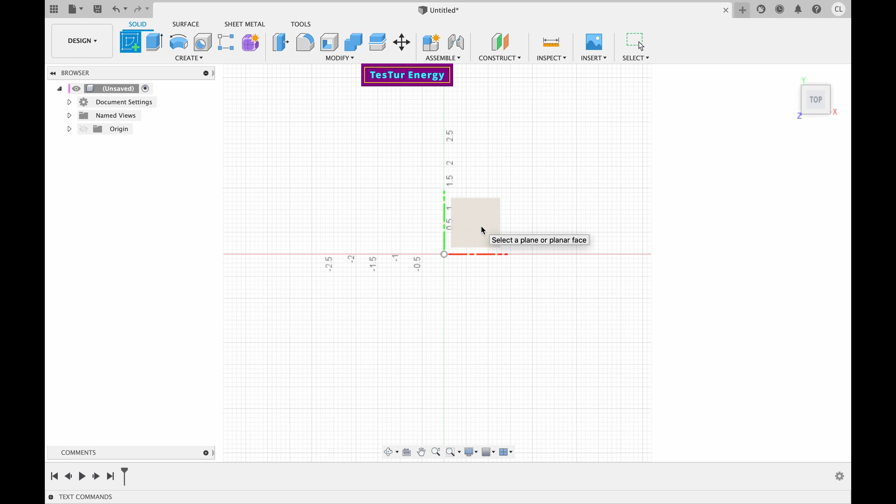So let's just get started right off the bat here. You can see that we're in a blank screen on Fusion 360 and it's untitled, and I'm just going to go ahead and start. What you're going to want to do is create a sketch and set the dimension, or set the angle that, which dimension it'll be operating from.

And what I always like to do is just start by making your first size of the disc. Let's go 5 inches. I really do not like seeing the dimensions on the screen when I'm building. I know what it is when I'm building it. I hate it later though because I never know what it is.

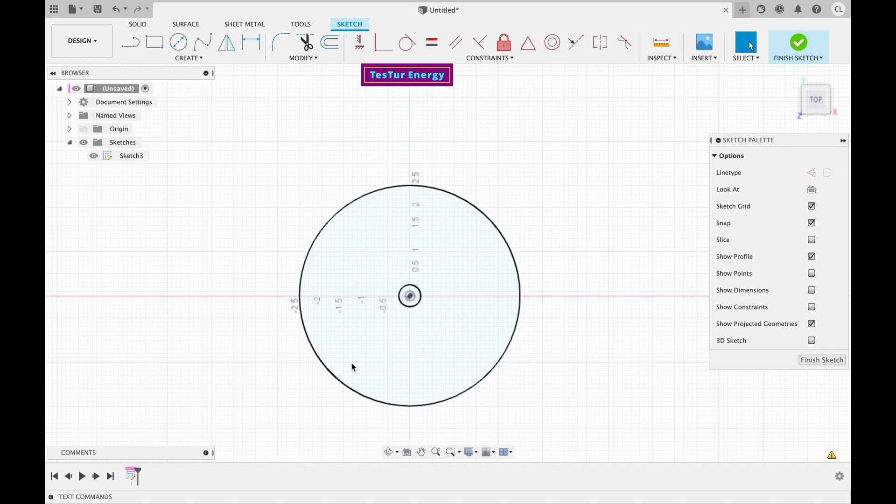But yeah, so I would just go with a 1/2 inch drive shaft in the center. Now, depending on if you want to do the old version or the new one, where you do a hub and then the hub of discs go on another shaft, or just everything goes on a shaft and you don't have the hub system, we'll just do the quick straight from the drive shaft.

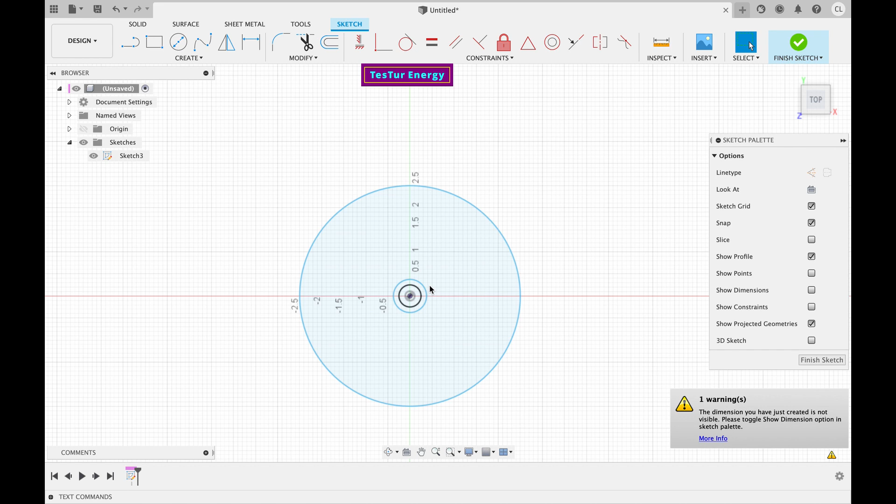So still you need an inner portion of the discs that are connected together where the spokes meet. So I'm just going to go with a 0.75, nope, not 75, 0.75. So we got about, I think it's 1/8 inch or 1/4 inch thick here. Let's see what that says. Yeah, it's 1/8 inch between. Let's go with a full, let's just do 1 inch, a full 1/4 inch in there.

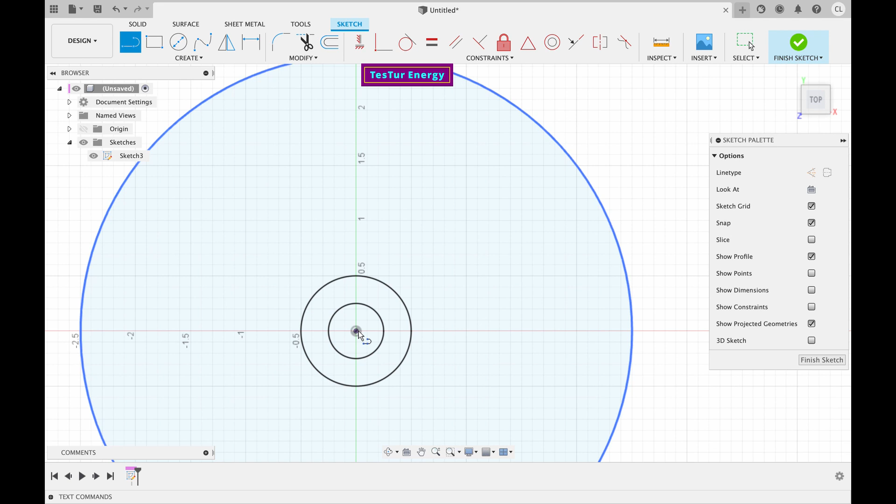So then I usually start with making the first spoke, and we know we're going to go up. You could go left and build them that way, either way works. And it's just, say we know we want all of the spokes within 1/2 the diameter of the actual disc.

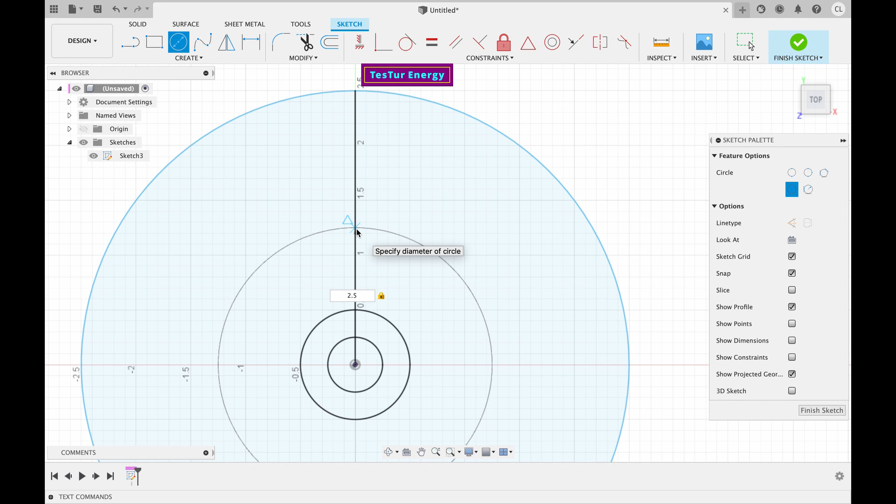So when we do all of the exhaust within 1/2 the diameter, that leaves 75% of the total disc area to still be usable for adhesive drag, for torque or for pumping.

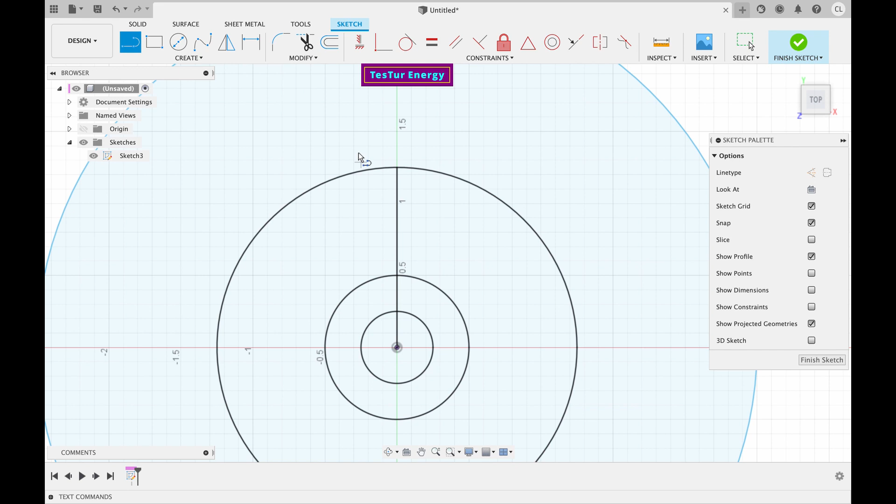But so we've got the inside here. Go to the offset. Make the first offset. Let's just say this are. We'll go with 1/8 inch thick. So 1/16 to this to the right, and then 1/16 to the left.

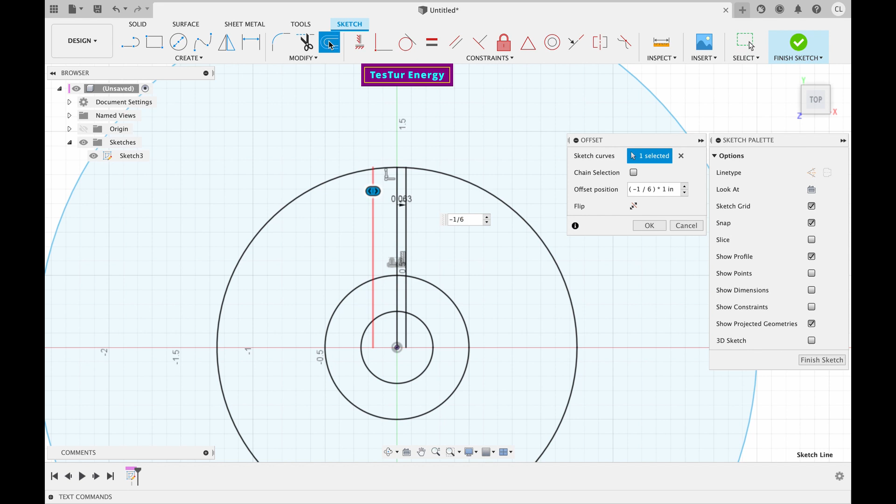Get rid of the center and trim off these lines. So we've got the majority of what's going on here. Then we're going to remove that so we can do our fillet. We're going to do that. Click the line. Let's just set it to 0.15. Do the same to the other side here.

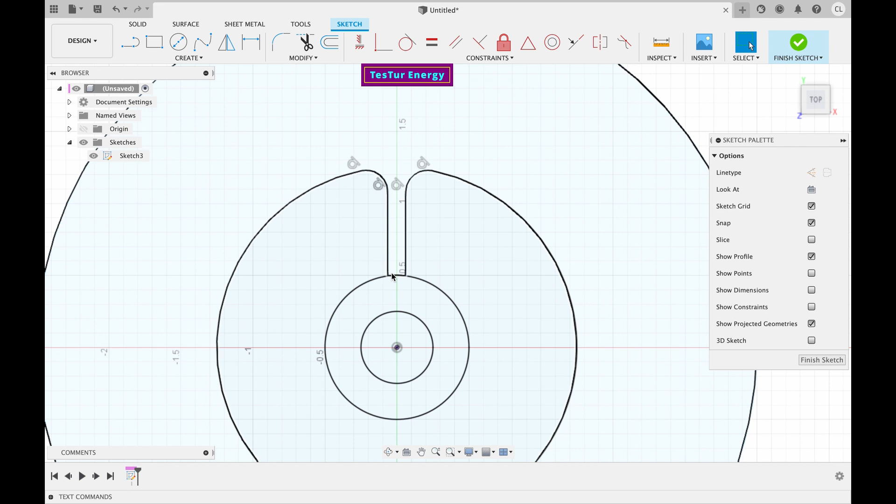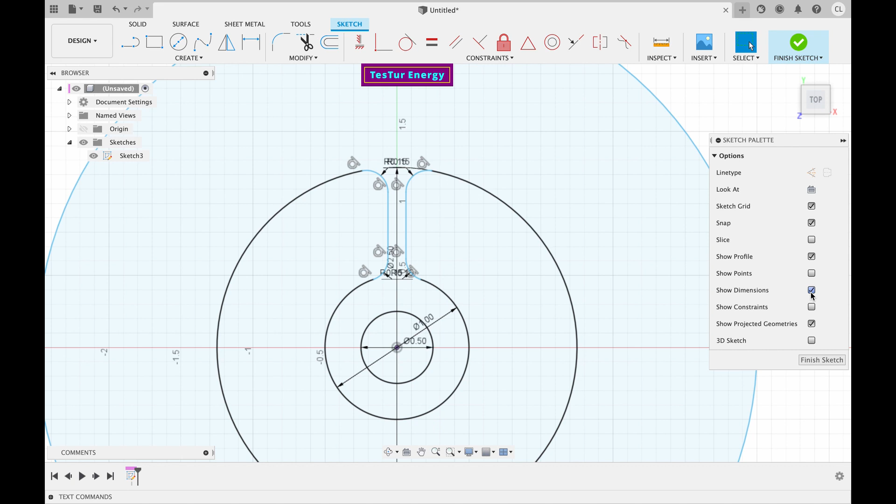Now we're going to do on the inside here. Just do the same geometry. These might come out a little skinny. I'm not saying you should do it exactly to this size. I'm just, oh shoot, what did I do to the other side? So I do 0.15. Yeah, there we go. If the dimensions keep showing up even though you've clicked on the thing on the side, and if you click it again, it'll go away. There we go.

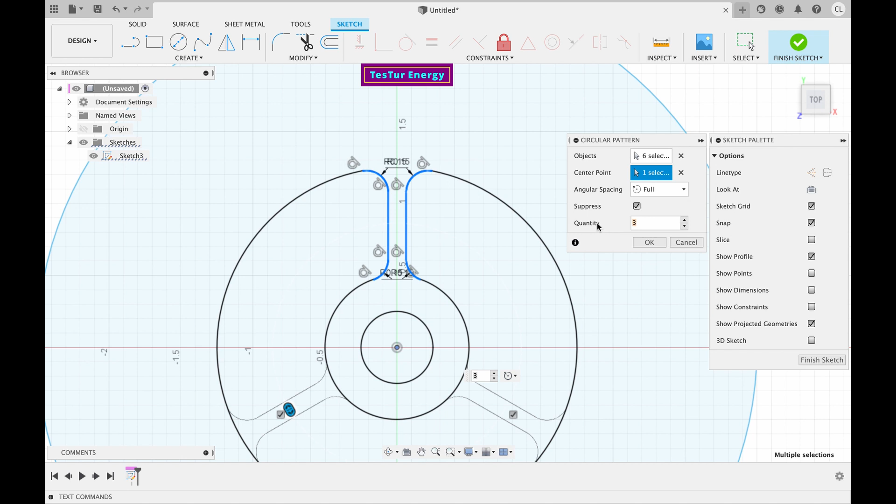So now we've got this basic geometry of the first spoke. I'm going to grab each one of these—I say grab, it just means select each one. And you're going to come up to create and do circular pattern. And click your center point, select the center point, and then you're going to choose how many spokes you would like.

If you want to do 3, you can do 3. If you want to do 4, if you want to do 5, 6, 7, you can do as many as you want. I usually just go with 6 because I like honeycomb, and it's usually honeycomb finds to be really, really strong in most applications. Not always, but generally you want eventually to pick what will not...

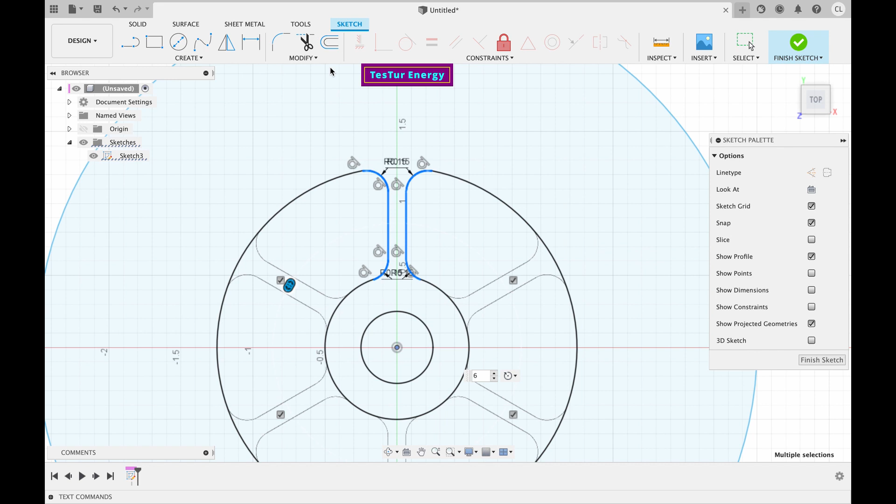combine with the resonances of your disc when they rotate, because at high RPMs they take cymatic vibrational modes, and you can kind of tweak your spoke numbers so that those vibrational nodes are dissonant with the number of spokes, so that it doesn't add to building up where the spokes are or aren't, and you get catastrophic effects. It's not a solution for everything, but it's something, if you really want to go down that rabbit hole, you can probably play with.

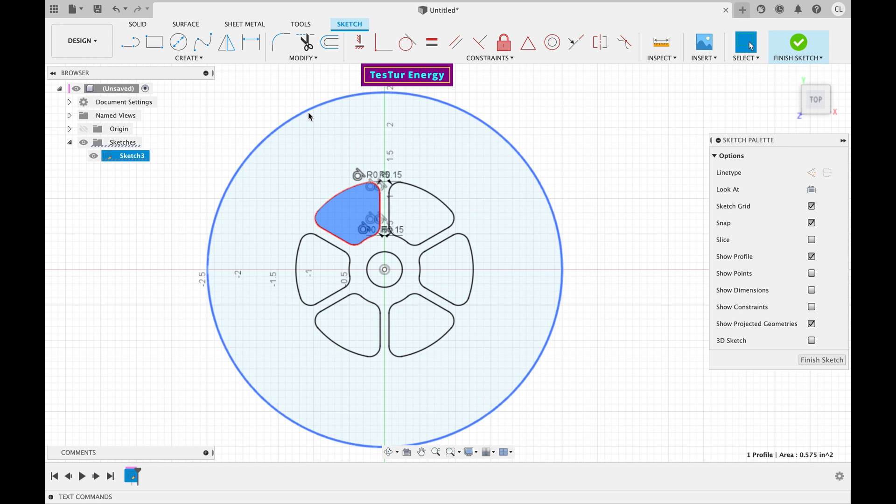And there we are. We've got a decent disc, we got spokes, we got the pretty large open area from a 5-inch disc. That's 0.575 squared inches per hole. There's 6 of them, so about a little over 3 squared inches. Pretty good size for an exhaust of a 5-inch disc, and you still have 75% of the open surface area here to be used for torque.

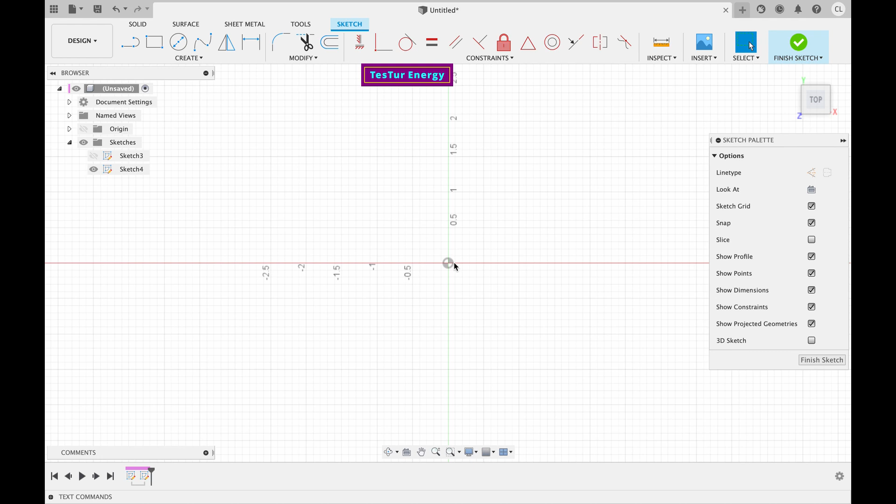Okay, so now we've got our disc. Now we're going to need a set of star washers. So we're going to copy all of these, finish the sketch, start a new one and paste them here. Alright, so I'm going to hide these dimensions and constraints.

Now, depending on what you want, how long you want your star washers, Tesla says to go really far past the holes. You can go really, really far, or short, depending on how big they are too. He says specifically in the patents that the star washers are only for creating the spacing in the center. So if you're doing thin sheet metal like I do, you can press the dimples in the periphery here for making the spacing, and continue pressing them in the center. And he says specifically that the star washers are preferable, not indispensable, and you can use just a center hub or a center circle that goes just about the length of the inner hub of the discs.

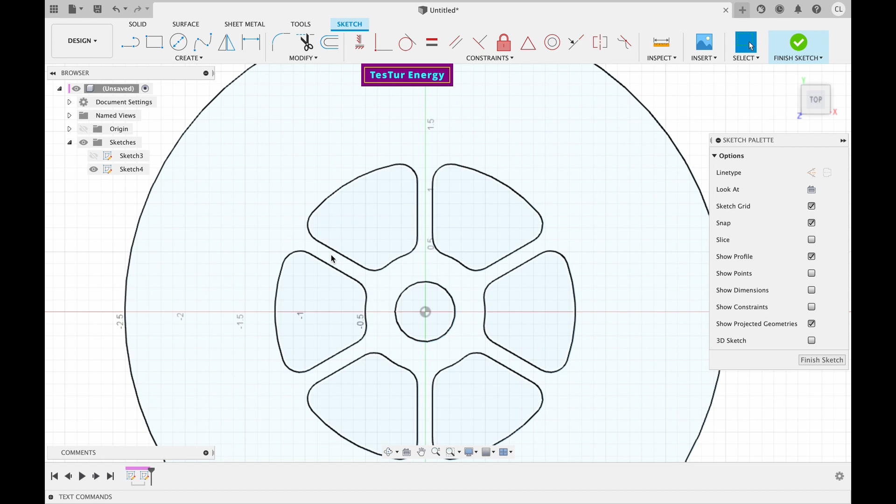I believe he says it's preferable to do the star washers, because if you have the space from the hub and then you also have spacers out past the exhaust holes, the spokes with a lot of air going in them can probably vibrate. If you have really thin ones like mine, they probably act like a harmonica where they'd get high tension vibration as the fluid's going past them fast.

But okay, we'll go to a line, do a line up this way to about 1.5 inches for this 5-inch disc. Do a 1/8 thickness here. This is if you want to just do star washers that are little straight spokes. And again, by no means is this the proper dimensions you should be doing with yours. I'm just doing a random layout of how to put this specific geometry together.

You can change if you want to increase this. You want to increase the diameter of the inner spokes, or bring this down, or widen your spokes - have at it. This is just to show you what to do to get these basic patterns on the page and work from there.

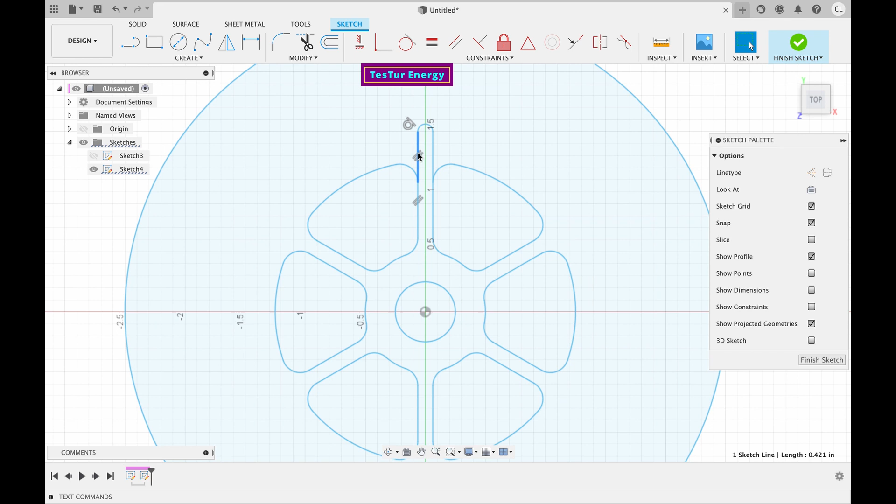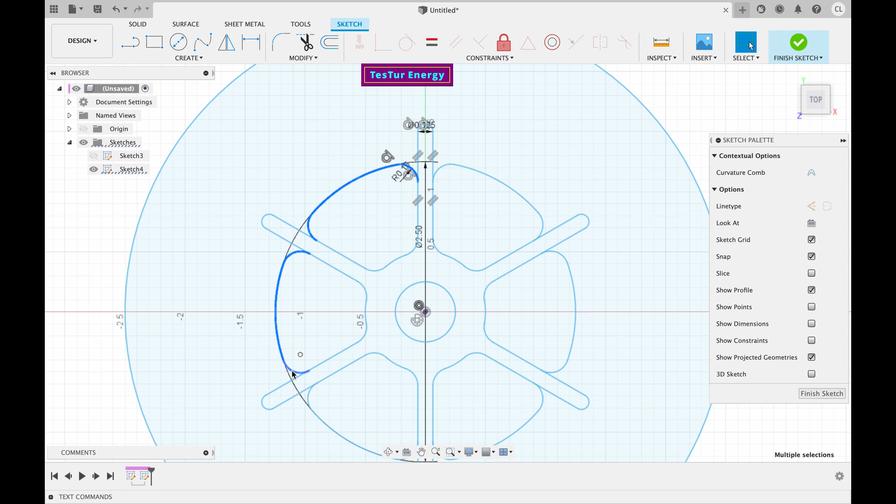So we got the first spoke going here, and we're going to take each of these pieces and do the same thing we did to the exhaust pattern, or the spoke pattern. Do a circular pattern, select the center, select how many we're going to do it over. Alright, and I'm going to delete all these pieces here, because they will not be used in this part, since we already have them in the disc pattern.

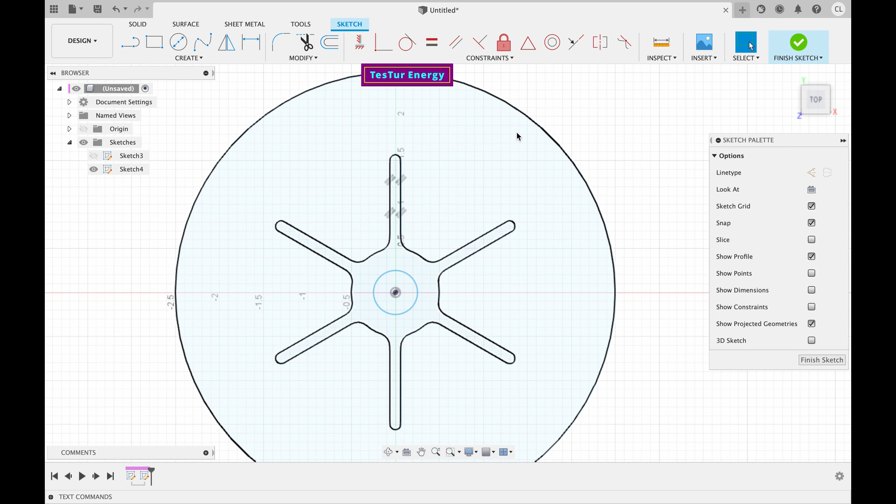Alright, so now we have both the disc and we have a star washer. And I don't know what that did. So, okay, cool.

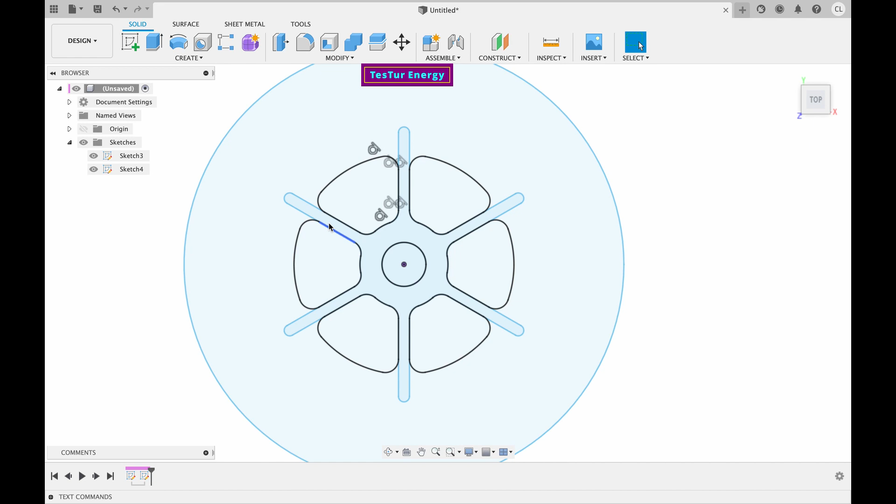So now, let's say you've got your proper disk settings and your parameters chosen. You've got your size, you've got your star washer, and I won't go into how to make the end plates in this one. This is just simply how to cut your star washers and how to cut your discs out of thin sheet metal like I do in my videos.

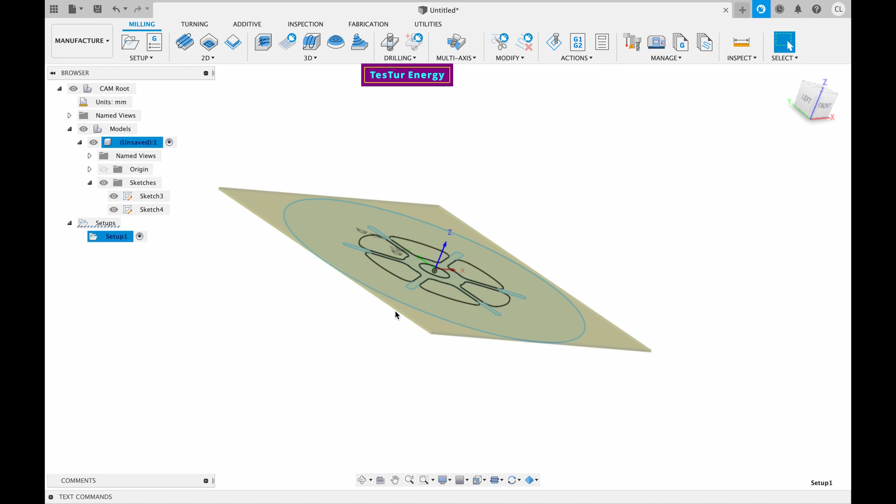So from here, we're going to go to manufacture. We'll go into doing a new setup. Select model - I like to go into and select specific sketches per setup that I build in here for each thing. So this will just be specifically the sketch for the manufacturing setup for the disk. So we'll select that. I don't really usually bother with the stock box at this stage because it's really simple to get what you need without dealing with it.

Alright, so there are a couple choices you can use here. I usually use a 2D contour because with the thin sheet metal, once you get through the top of the material, you can just continue doing single cuts around because it's thin enough. You don't need to do multiple step downs with it. That's at least for the aluminum I'm using so far. I'm going to be testing stainless steel here soon.

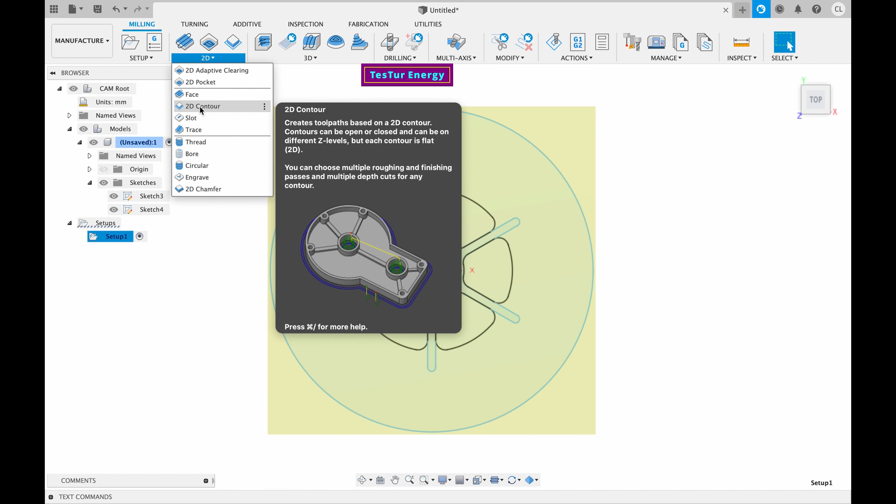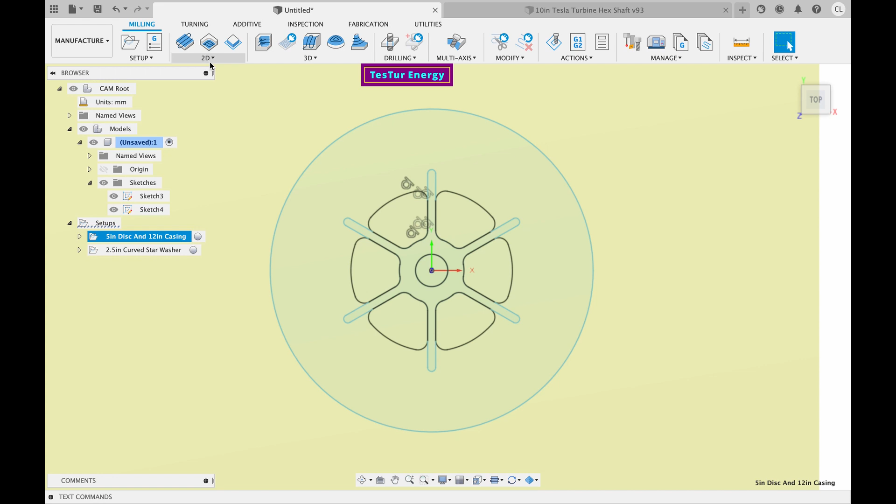Okay, so I'm gonna jump right into this because I don't want to have to go through all the settings for how to make this - I will make another video on what to actually choose for your settings, for your feeds and your speeds. I'm not trying to go into that in depth right now. I'm just trying to show you once you have these pocketing programs, or I believe we're specifically going to do a 2D contour pocket.

Once you get your 2D, I'll start from a new one to show you. You're given all of your choices for feeds and speeds. I've been using my 2mm single flute flat - I think it's flat, but I don't know if you'd consider that flat. It's pretty sharp. Depending on your machine and material, these are going to be completely different.

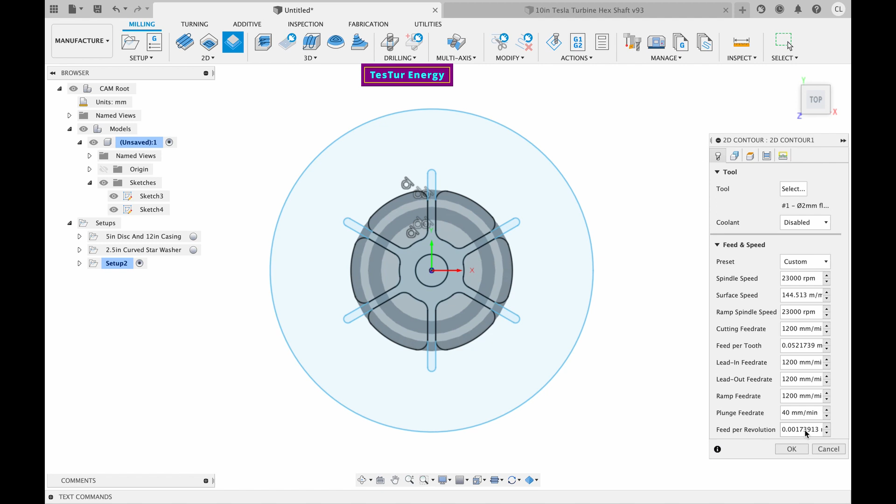So you're going to want to come through and set your heights. Generally, I like to stick pretty close, however I've been changing that now that I'm using my magnetic fixture that holds the stuff down, because it's got to come up and over stuff so you don't hit it. But right now, we can use this just for a simple thing.

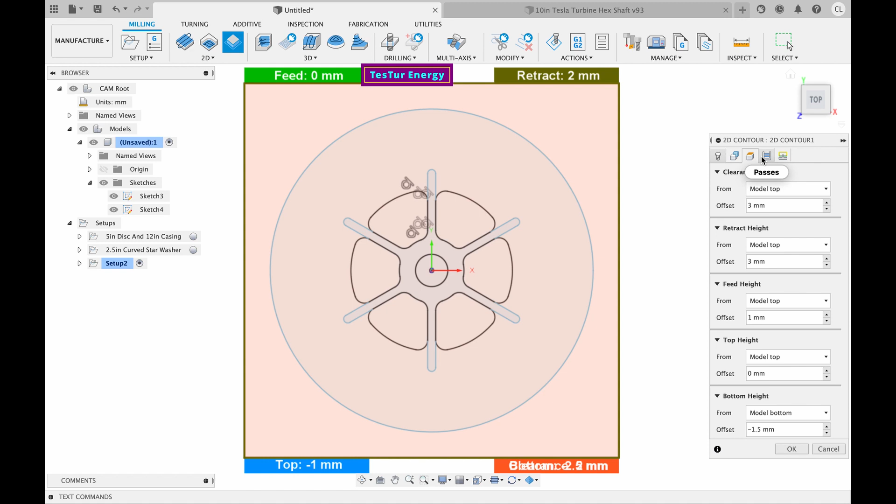So the passes, I don't do too many. I don't do a roughing pass at multiple depths. Once you get the right feeds and speeds for the thin aluminum, it's pretty on point. I do usually use a ramping setting, but I'll show you that in the other one.

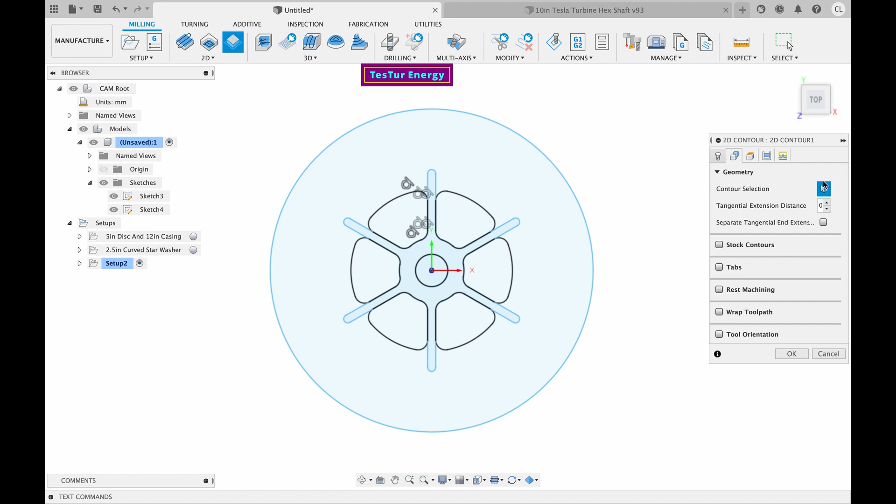From here, you're going to want to come through and select your geometry. If we're just doing the disk, we're going to select each one of these, each one around.

Usually I like to set these things in different packages, just like all the exhaust is one operation, the drive shaft is its own operation. But to speed things up, I will make it.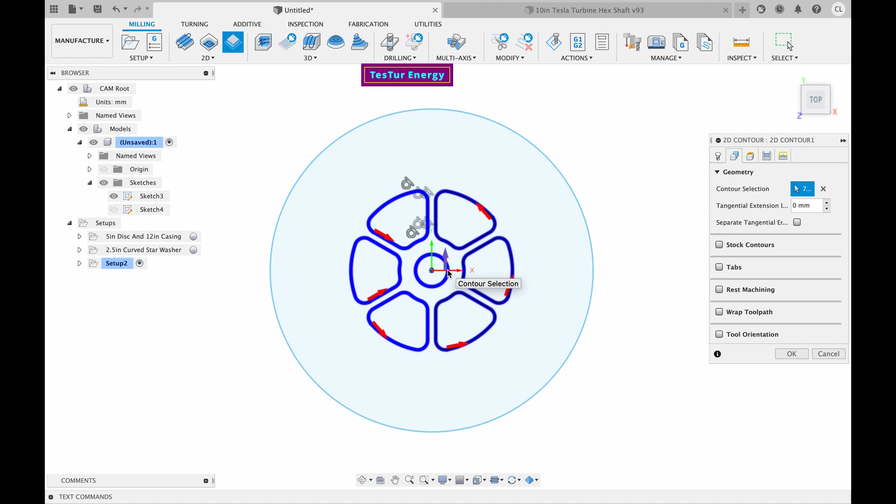So for these packages, or the 2D contours, you can set it to do inside the geometry you're choosing or outside the geometry you're choosing. This specifically, you want inside - you can see the arrow will go. Sometimes on this program you can't tell whether it's inside or out, depending on how zoomed in or out you are.

But I have my tool program, so we won't have to go too much into that. So then I'm just going to hit start. It's going to run the package, and I think this one did a roughing pass, and then it drops and does a finishing pass, but I don't usually use that.

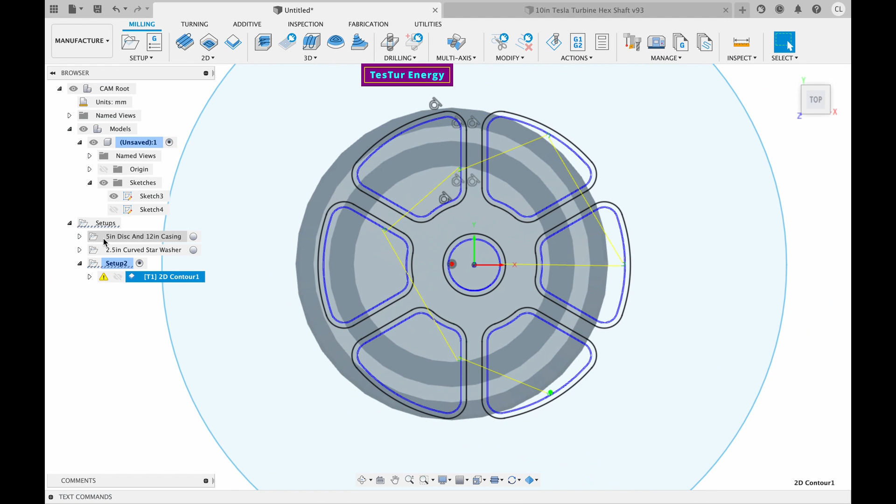I'll show you when I set up my other one how to specifically do what I'm using. So you can see from here that it's chosen the toolpath for all of these geometries.

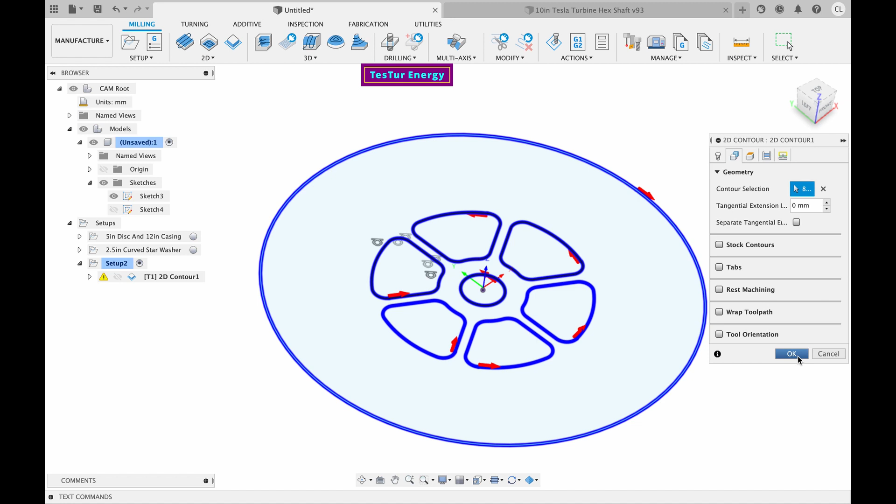If we want to actually go in and cut the actual disc out too, add this one - and like I said, you want to choose the outside for the disc cut. You can see if we go from above that it's got all of the inside cuts on the inside, and all the outside cuts on the outside.

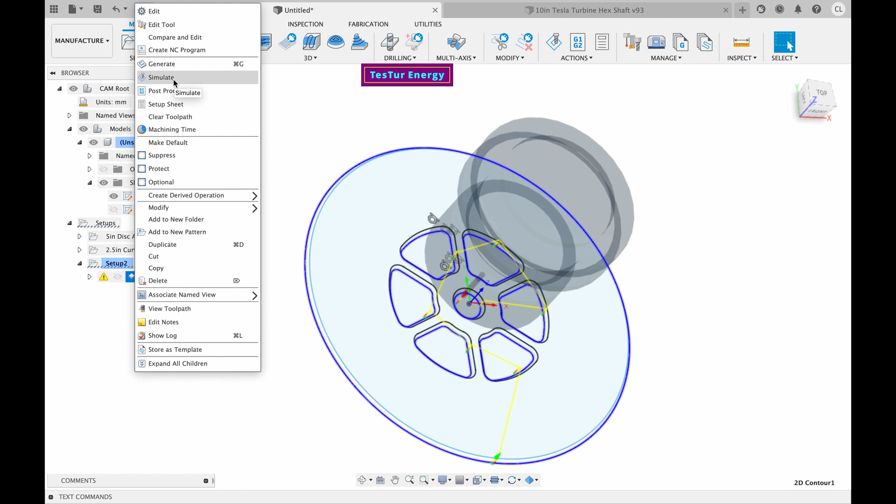Then if you want to check it, you go right click, or double click if you're on Mac, go to simulate. If there's errors in the program, or if you have it set up more in depth with a fixture programmed and it's going to crash, or it says your bit's going too deep and the collet will hit, or it's going to grind into your project, it'll give you a little red arrow or red error wherever it's erroring out.

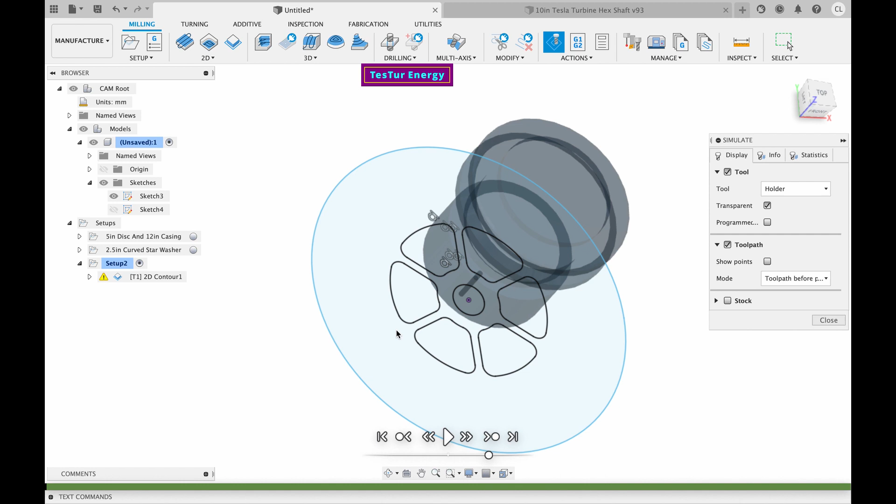But I think this is generally pretty simple where we're going right now, and if you have the right settings, you shouldn't have to worry too much about this. I know this is really quick - let it run through the whole thing. I think it'll do a finishing pass on the cut.

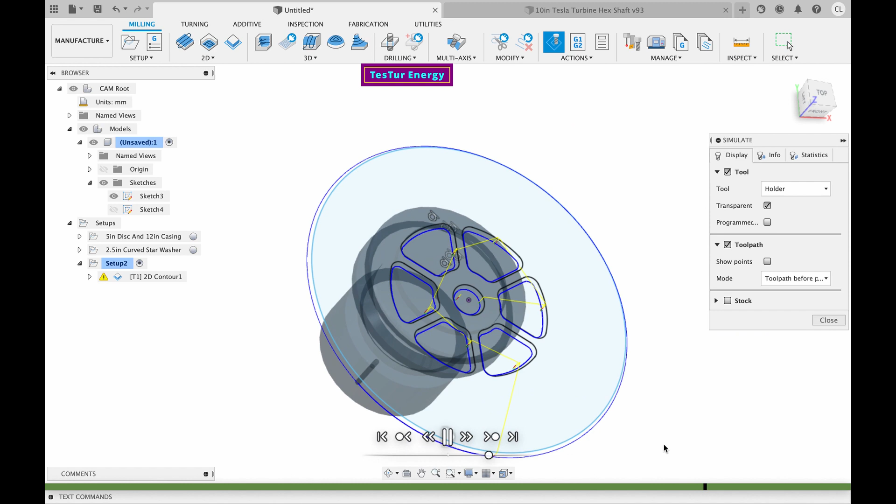It's my opinion that once you have the right feeds and speeds, and I've shown from my practice, it's just one and done, and you get really nice, super nice edge cuts. So we've got that set for this one.

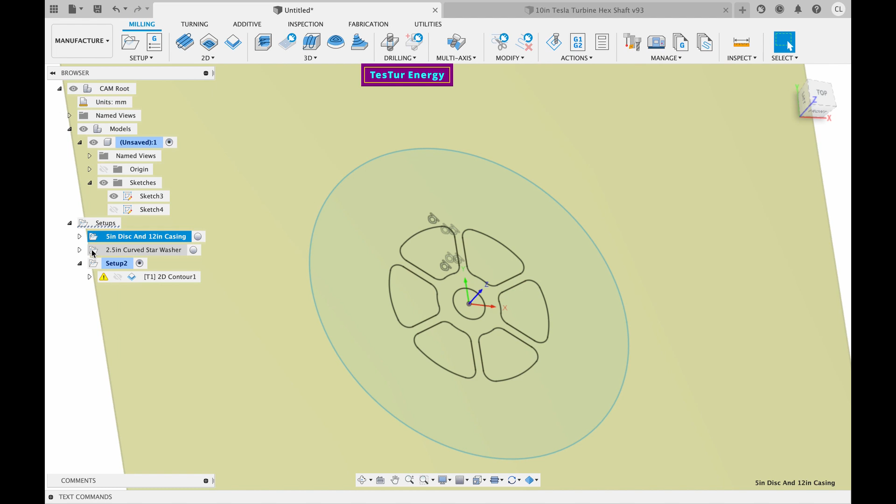Let's go back in - I'll show you the star washer then. Again, I pulled these from my other program just so it's easier to show. But I guess I don't really need to do that. Let's just add another setup.

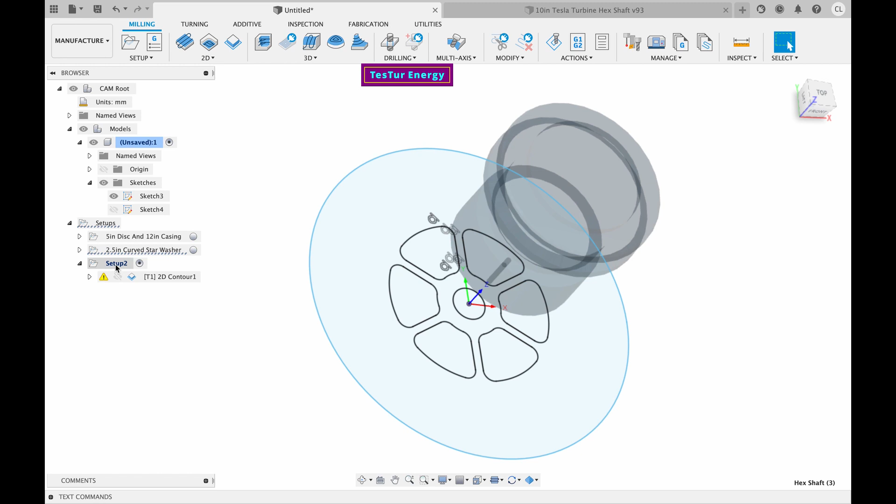And select the model - we'll go select the star washer. Star washer on.

One of my favorite things - well, I guess not my favorite thing - but when you actually have bodies, it says on the sketches, and then it's got bodies. Whenever I'm working, I'm like, oh, I gotta hide the bodies, get rid of them so you can see your sketch on the bottom.

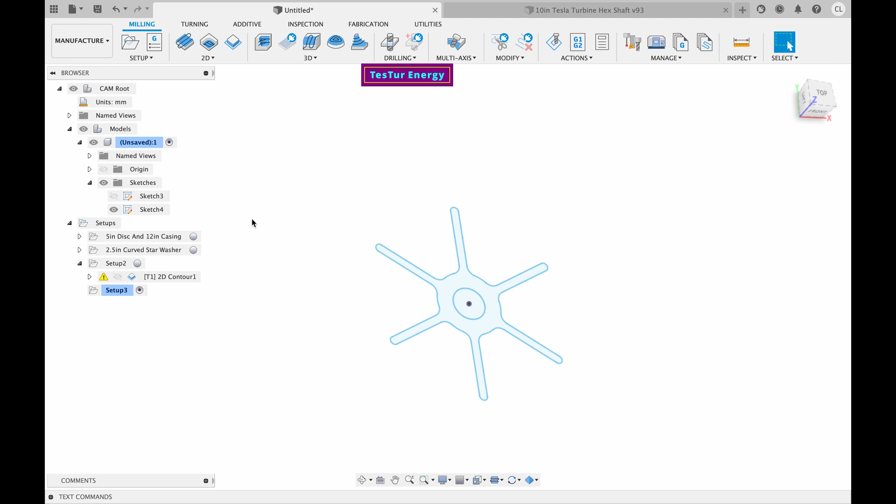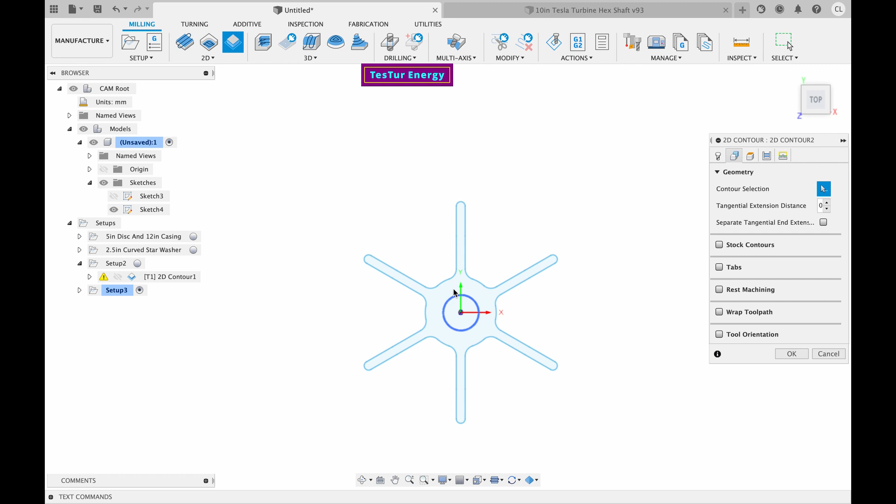Alright, so we're going to do another 2D contour. Go back to the top. I believe the feeds and everything's set the same way as it was before. We're going to go to geometry and select this, make sure it's on the outside. I'm going to select the inside of this one. Make sure that's in. It should be a pretty simple path.

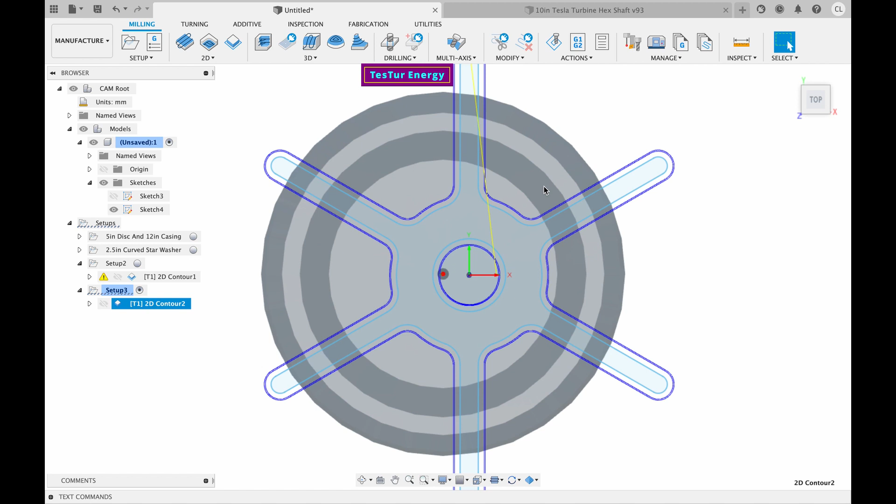You're going to have to pick your feeds and speeds later when I make another video explaining some of that. If not, you can find tons of this on the internet for specific materials, and you'll have to experiment from there, because I'm still working out stuff with my 6480 since it's not rigid enough to do normal mill speeds. It's going to be a lot of trial and error at this point.

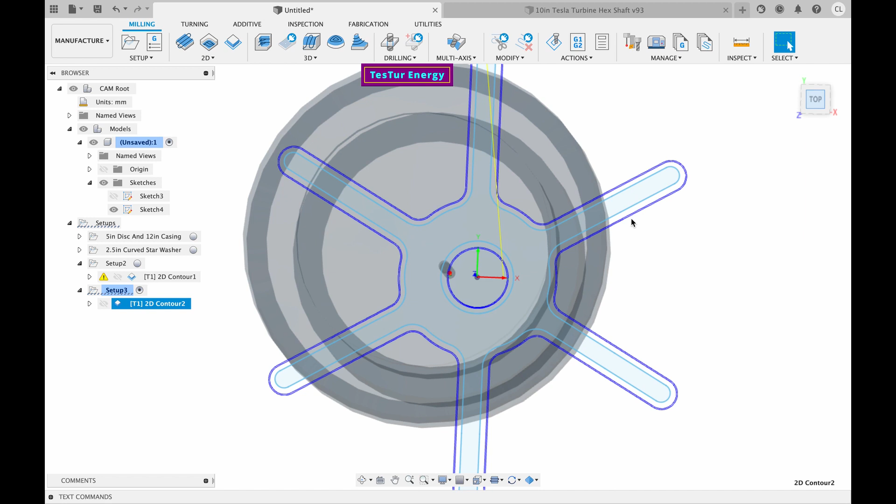So yeah, we got the star washer machining. Let's look at some stats for it, to see how long this is actually going to take me. So the star washer for this package, I believe that's going really fast, it might need to be slowed down. This is one minute to do the full machining, but let's simulate it.

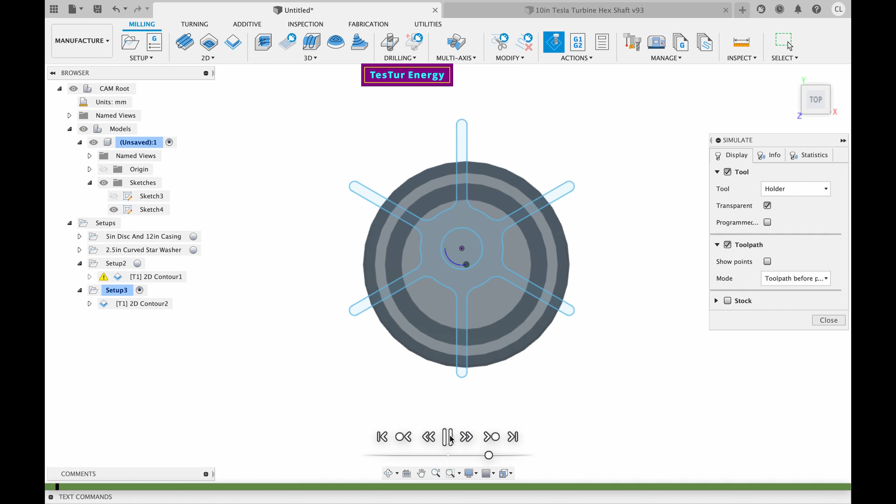And no errors, which is a good thing. If you zoom in, I believe it slows down to the actual speed, although it does look like it's going almost actual. That's really fast.

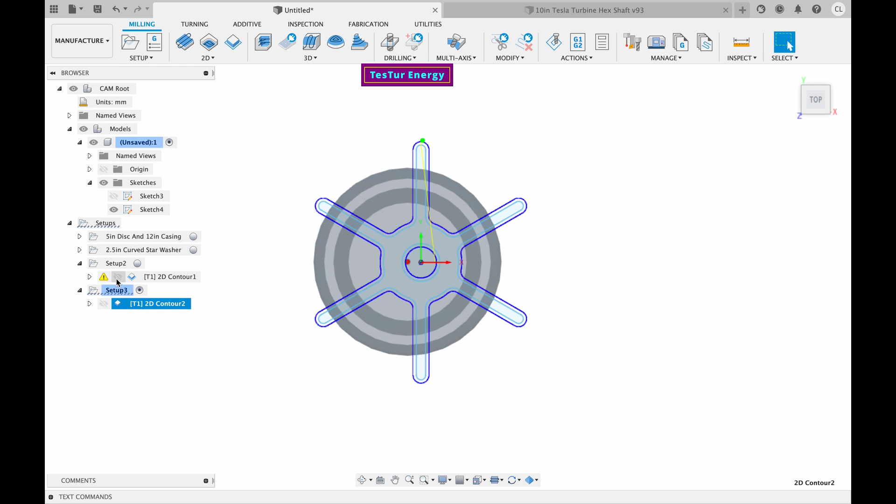But yeah, so there you go. Between the two of these, we've got the tool package and the CAM program for both the star washer and the discs. Pretty simple. From here, you'll end up wanting to export or do the post process.

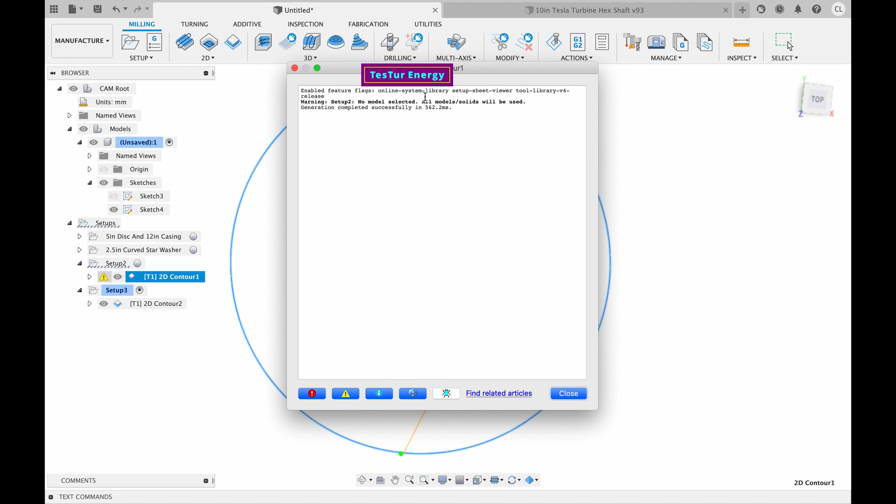Oh, what's this error we got? Sometimes it'll give you this error and it says there's a warning, and it says no model, which isn't a good thing. But sometimes it says something where your Z depth's going to go down and go too far past it. If you know you've got it set up right and it's giving you an error, and you know you've chosen the right thing, sometimes you can ignore those.

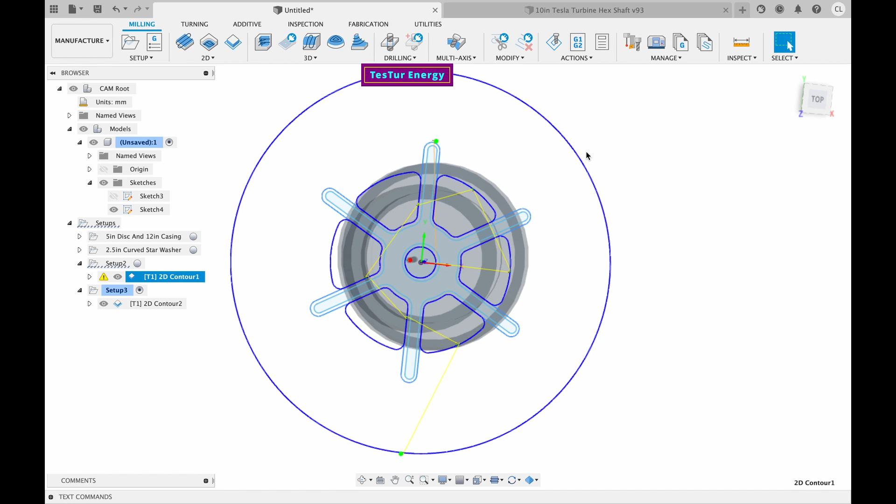I do it, I'm not saying this is all the time, don't use this as a rule of thumb. Do this at your own risk, because I have crashed my spindle and made mistakes. Just because there's notes here that sometimes you get the little warning symbol and it'll still work, be aware of what it's saying as a warning, because sometimes it won't work.

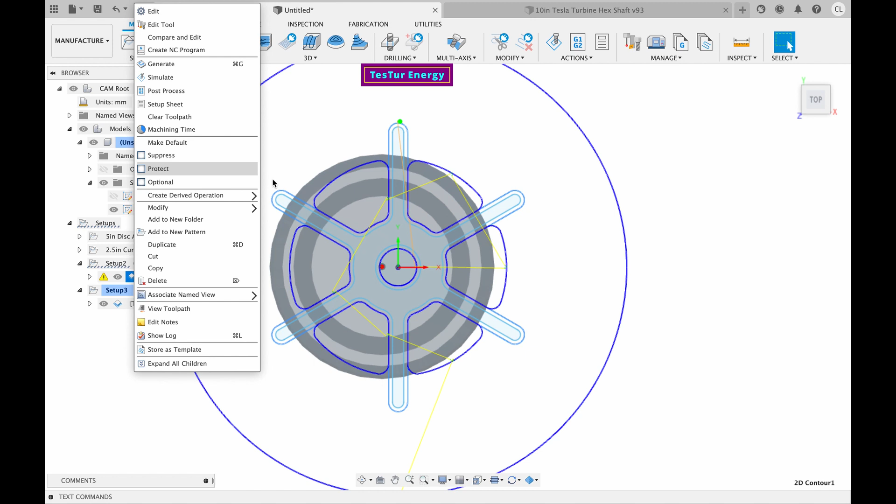From here, I usually would do these in two separate because they're different operations. Let's go to pick post-process. I'm using Mach3 with my machine. So you just hit OK.

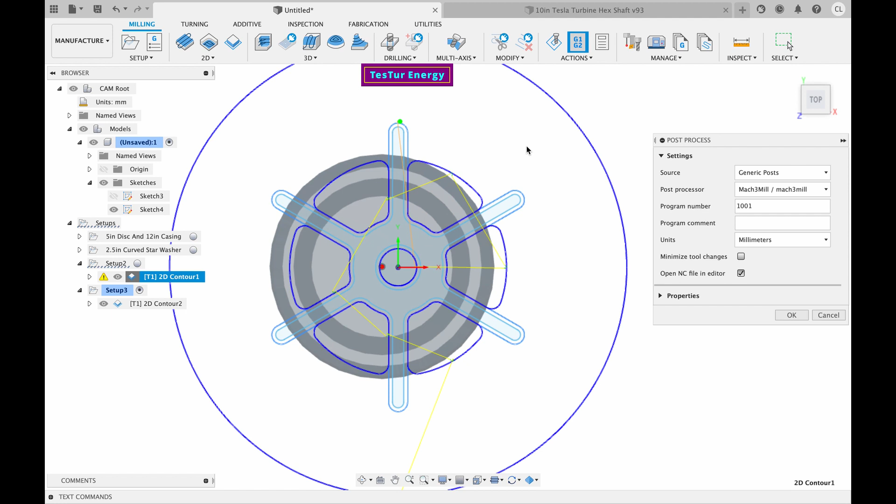It'll ask you to save, and then put it to your jump drive or however you get it to your CNC machine. But yeah, that's pretty much the basics, start to finish, on how to make your first discs, to make the star washers for that disc from your disc pattern, to then bringing it over to your manufacturing and getting your CAM files going, how to post-process it and take it to your machine.

And again, once you have the feeds and speeds and everything, this is just rinse and repeat. Pretty simple, not too far-fetched for the average DIYer to get their hands dirty with.

And Fusion 360 is amazing. I really, really like it. I'm not affiliated with anything, I'm just an avid fan. I pay for it now because I've used up the year free that you get.

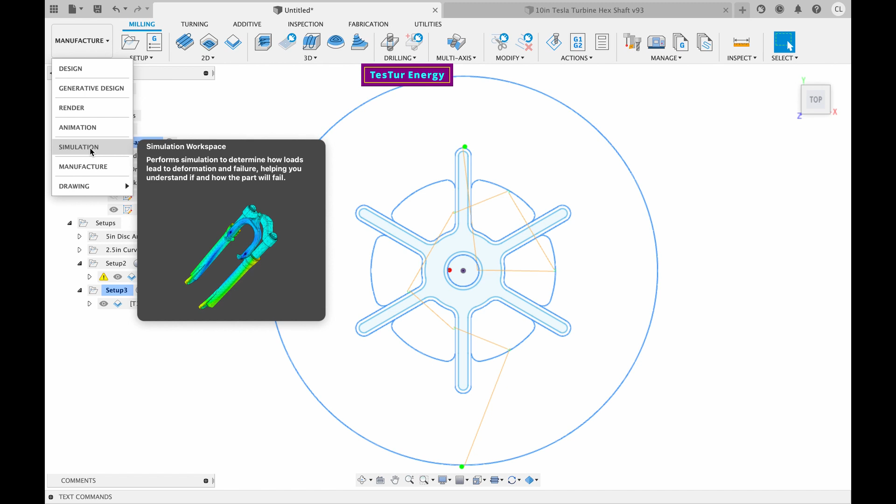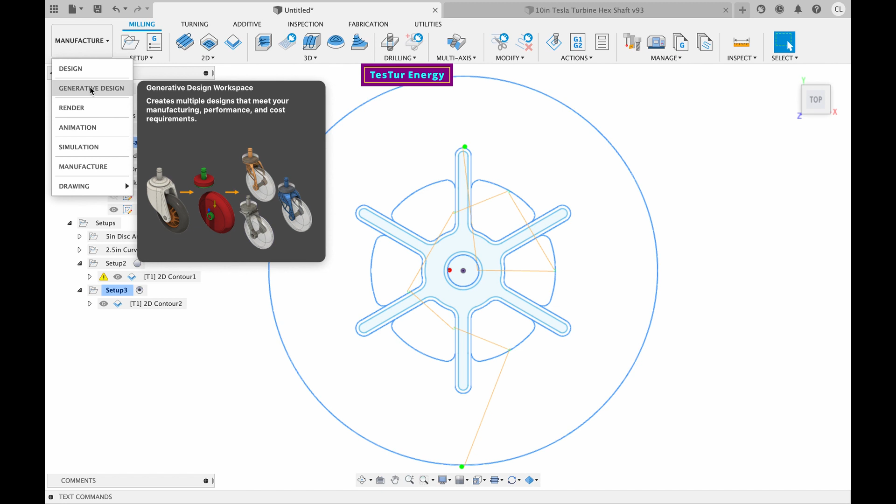But they've got simulation packaging, I haven't even figured out yet how to use this. You can do animations with your stuff, render, generative design. However, it's a weird credit program you have to pay because you send the program to be run to the cloud, and they use their supercomputers to run it, since they are pretty advanced calculations that need to be done to run some of the generative design. But that's their whole business model.

But I haven't gotten into the drawing yet. The render is pretty cool, I haven't really gotten into that yet, but animation was my favorite, and that's how I've made a couple of the videos you may have seen, like my Tesla solar powered video.

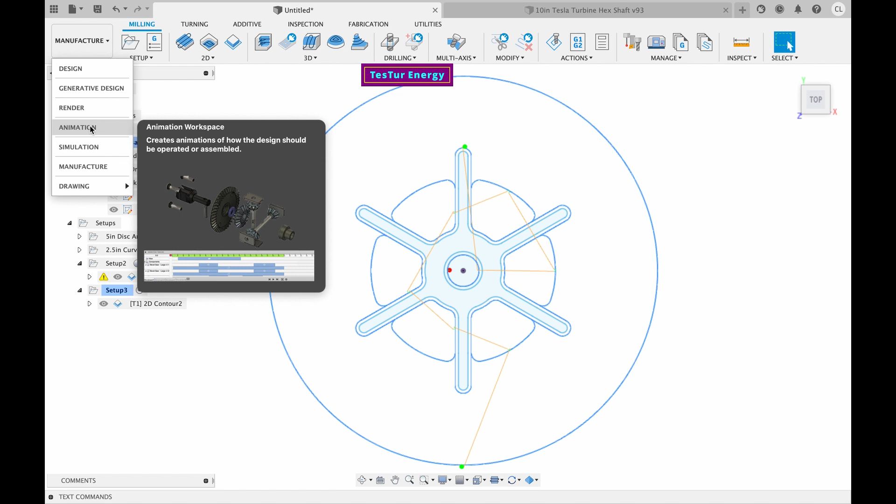But yeah, I hope you guys like this. I hope this was useful for some of you guys who are planning on DIYing your own Tesla turbines, or getting your own CNC machines, or have your own CNC machine and want to know exactly how to go about doing your own Tesla turbine.

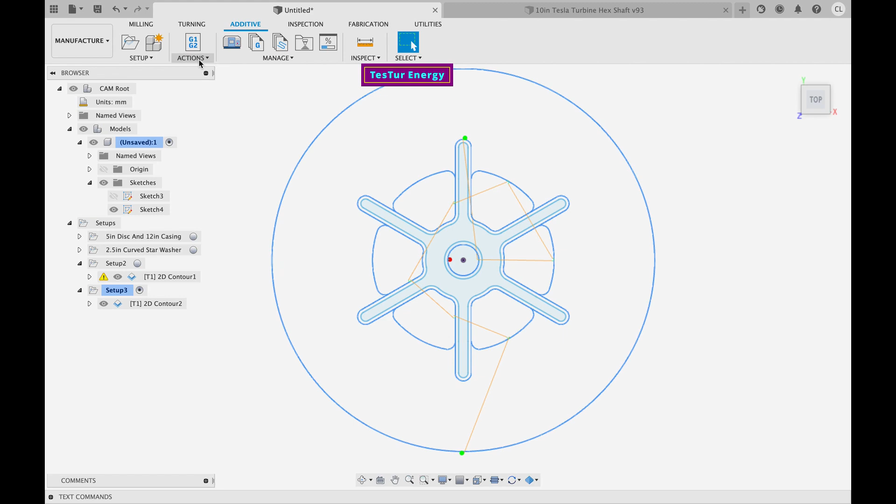There are a lot of other CAD programs you could be using, I'm not even going to go into the list of them. This is what I use. I find it really simple, and it's got a very powerful platform to use. You can get into turning, additive, I've been told I'm not really too much into 3D printing yet, but I've been told it's becoming the standard that a lot of 3D printers use. You can slaughter me in the comment section for making such heretical statements if I am completely wrong.